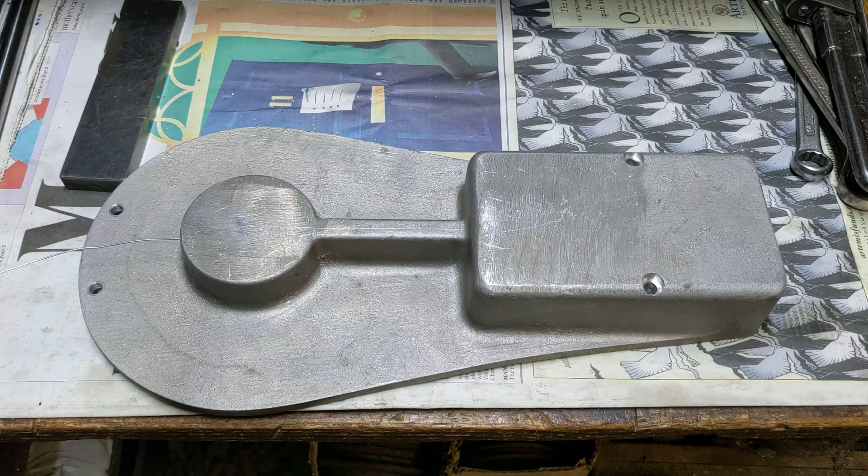So when we left this, we needed to drill some quite long holes, and they've been really quite tricky to drill because the drills were getting full and blocked with bits of aluminium swarf, and it was difficult to clear the flutes because they're quite long holes.

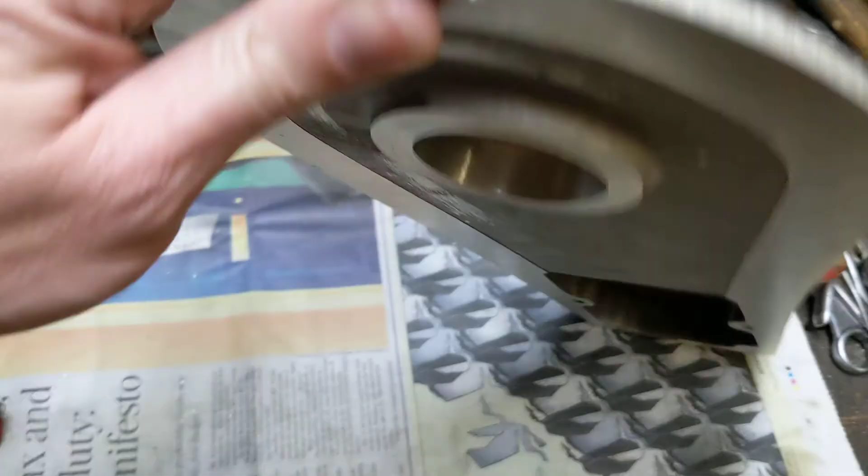To give you an indication of that, I've got a piece of wire here that's bottomed out, and if I extract the wire and put it there, you can see that hole goes right down to about there on the timing cover. So that hole is that hole there - you can see where it breaks through right in the center. It goes through that hole there on the end of the bearing, the end of the shaft.

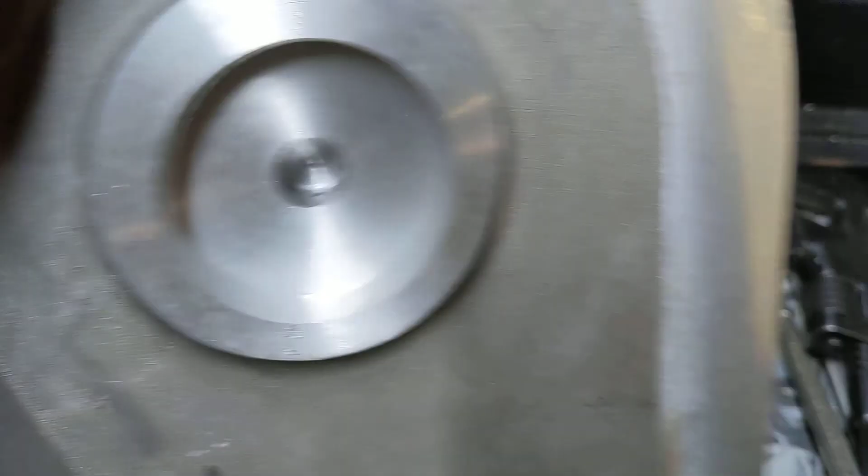So any oil coming into this chamber will then get forced into the sleeve drive crank. And the other hole that we've drilled is on the bottom there. That hole there, you can see, comes all the way through, and you can see how it's just picked up the bottom here, and that comes through to almost the very end of here.

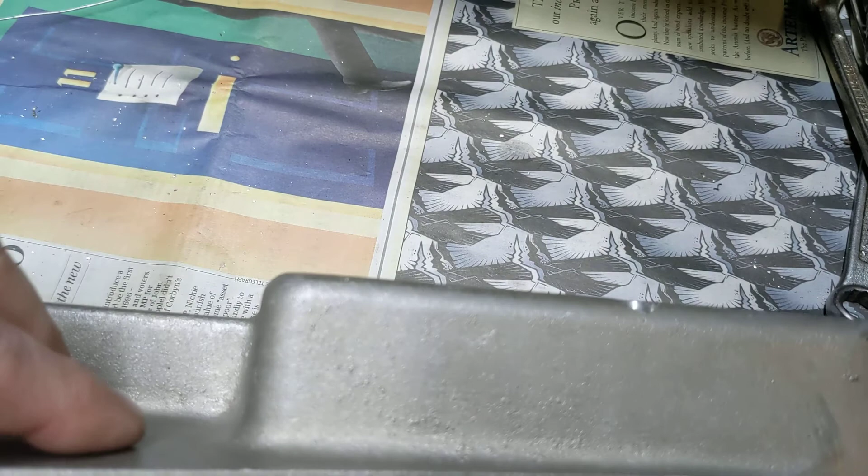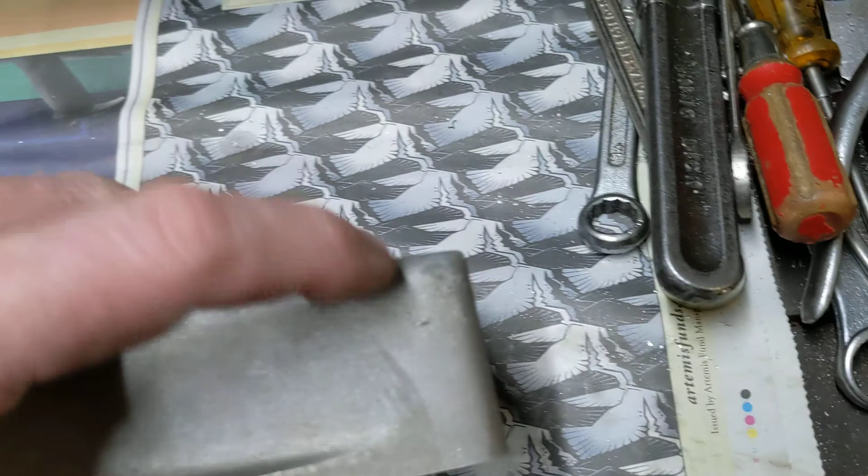So the two holes overlap. This hole here, which is closer to the bottom of this plate as you're looking at it, finishes about there, and this hole here, which is nearer to the top of the plate, finishes about there. What that means is that when we drill through from this side, we should pick up this hole and we should pick up this hole, linking the two together.

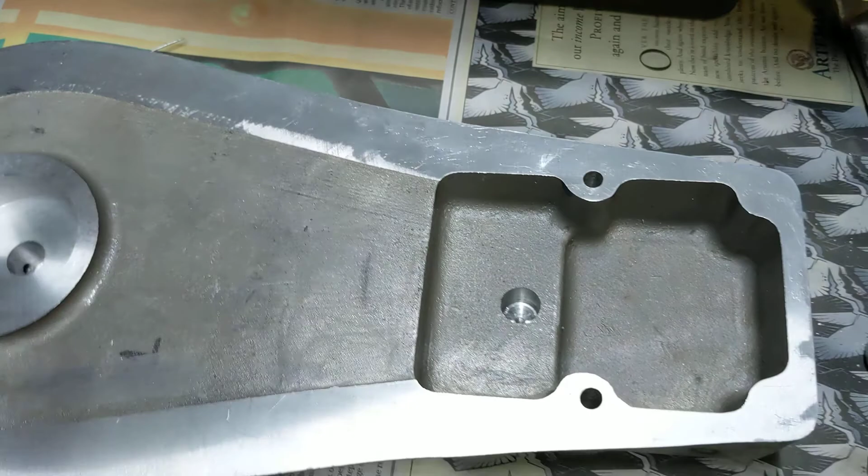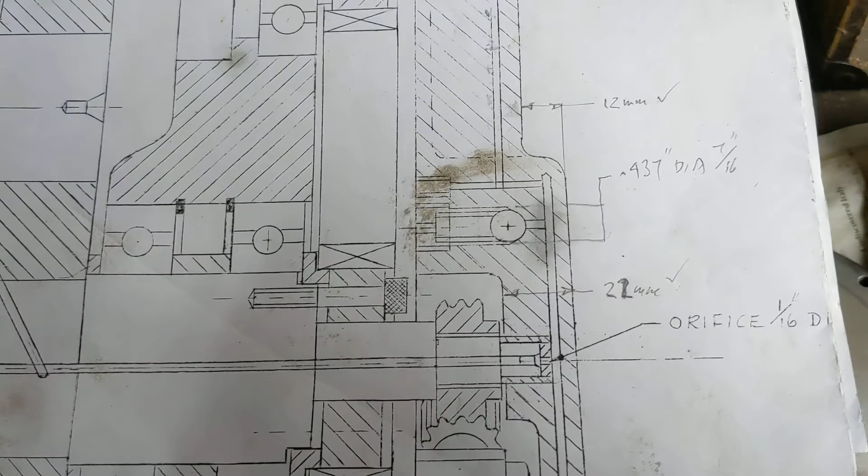So we've managed to drill this hole, the big long hole that comes all the way down to here, and we've managed to drill this hole that comes all the way up to there. Those holes do overlap top to bottom, so that when we drill through, we'll get a complete passage for the oilway. That's probably the last tricky operation, the big long holes.

There's a couple of holes that we'll also need to drill in the timing cover that are a reasonable length. That one's quite long, I suppose, but pretty much that's the tricky stuff. Tricky stuff is drilled, so that's pretty good progress on the timing cover. Not an awful lot left to do before this is finished.

Obviously we've got to put it back on and drill all the holes around the outside and get it mounted, but that shouldn't take too long. It's just a case of drilling through here and here once we've lined up the pump, and also fitting the oil pressure relief valve in case there's any problems to stop the engine destroying itself, and an orifice plate in here so we limit the flow to the crank to allow oil to come up to the top.

So a few things to do, but really good progress, quite pleased with that. And again, every little bit of progress is another step towards getting it finished. So that's the latest update on the engine work.

You've seen the infinity mirror in the bog.